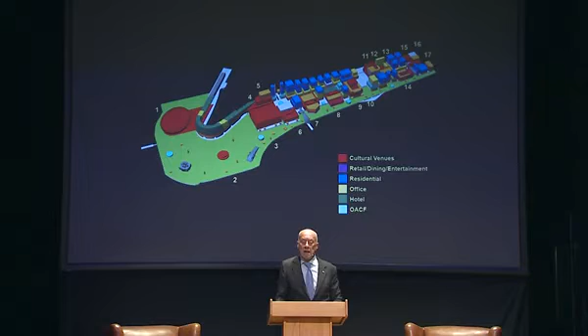If that was one example of a master plan, then a second is in Hong Kong, West Kowloon to be precise, as a kind of extension of the city. Here you can see it as a three-dimensional computer-generated image. What I'm not sure you'll be able to see, but in the bottom left projection there's a yellow line — that was really an extension of Hong Kong.

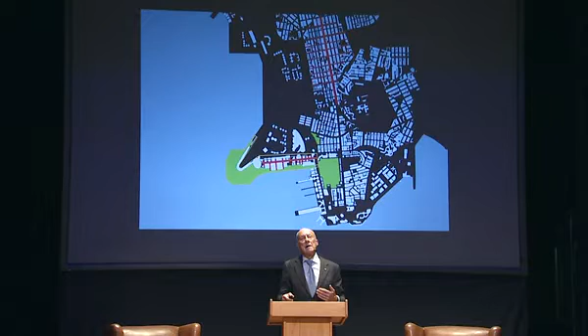So how do you recreate another part of an existing city with an emphasis on culture? Well, our starting point was to try to identify the DNA of Hong Kong itself. That started in the age of a computer with a sketch, a series of sketches to identify those characteristics, to try to abstract them out and distill the best of those urban qualities, but at the same time to alleviate, to take away the pollution and the congestion of traffic.

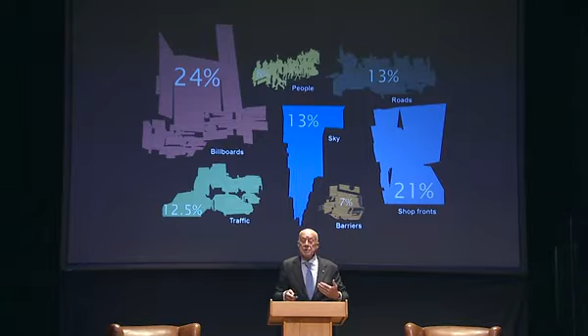So that led, as you'll see, to a kind of multi-layered solution. But first, the analysis — you'll see a proliferation of signs, and you also feel a certain proportion of the main streets and the alleyways. This is just a very, very small extract from that master plan, in the same way I'm only showing you a glimpse of the previous one, Duisburg. So when you abstract that out, and then find the percentage in the visual field of each of those elements, that then becomes a design tool to recreate the extension of that.

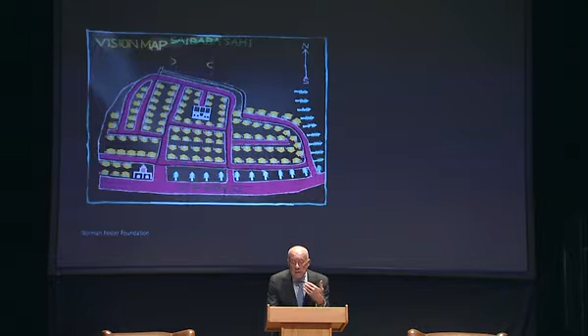When I questioned them on their design decisions — for example, the symbolic trees at the bottom, why is the landscape there — they explained that was the direction the hurricanes would come. Then I asked what the white building in the middle was. They said, the white building in the middle is a sanctuary, which would enable us to find protection. We would not have to leave our community in the event of a hurricane warning.

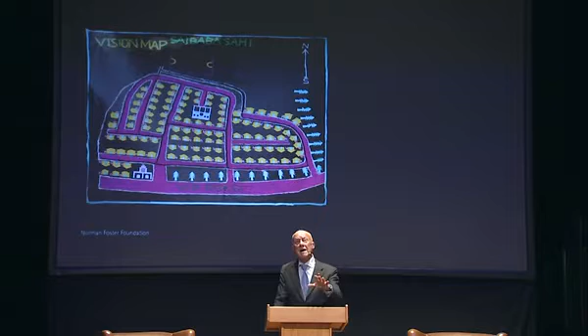Then I talked about the space to the north, and they said, that's a swamp, but we would see the swamp filled. And I realized I could have been talking to a group of students in a school of architecture.

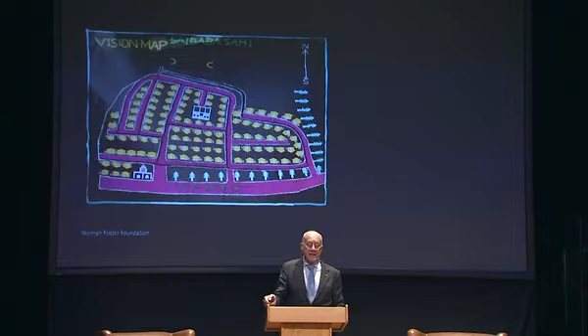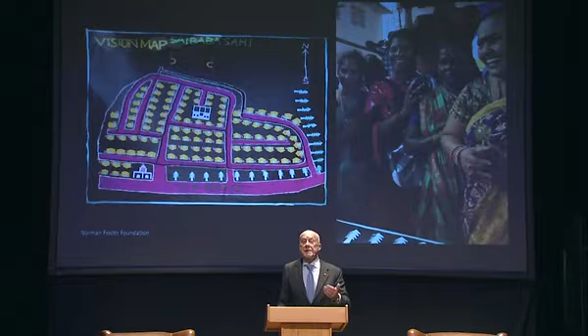I asked, who was responsible for this? Of course, the ladies on the right, ranging in age from grandchildren to grandmas, were responsible for this extraordinary design vision. That gave us the clue that perhaps models and graphics would be a way to work with a community like this to effect that transformation of standards.

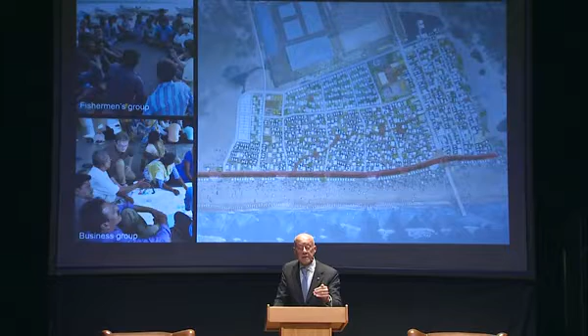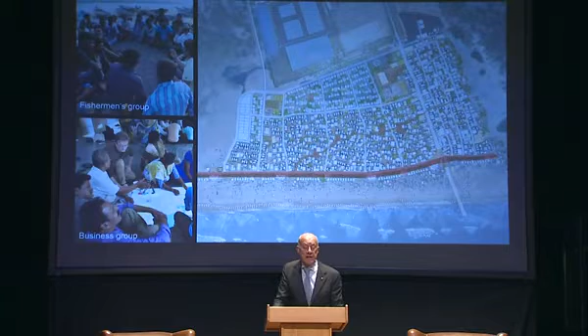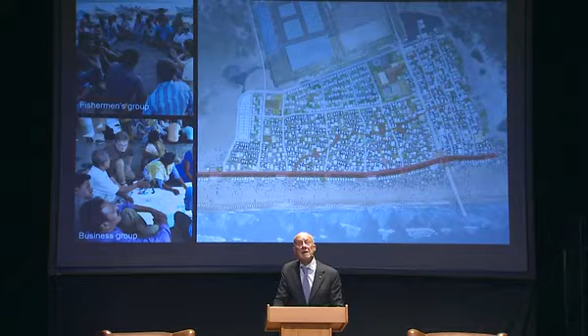If you retain the image from the past, the dwellings have been taken from there because they're vulnerable to hurricanes. The swamp to the north has been filled — that's a relocation for expanding the housing. Then the business group: you'll see that diagonal route, where all the shops, the commerce, the informal trading would take place. So the businessmen wanted that route strengthened and improved, and the fishermen wanted the coast improved.

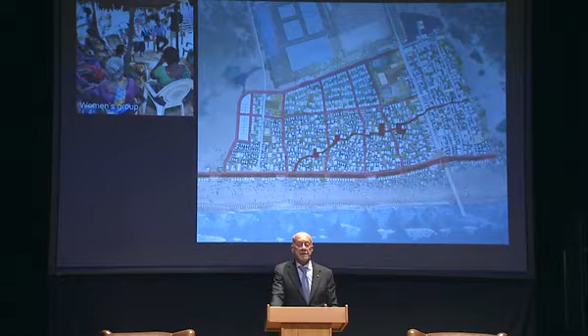And amazingly, the women wanted more safety, more security, and their contribution was the lines that run at right angles to the water. So there was an increase from 50% to something like 93% in terms of access.

We were using models, working with the community, encouraging them to contribute to the process, to identify their desires and how to overcome some of the shortfalls. That model then became the basis for a town meeting and voting in favor of the master plan. Again, quite interestingly, the predominant group are the women — they're the real creative driving force behind the community, with the fishermen obviously creating the livelihood.

As in any project, in any city in the world, all of these decisions have to be filtered through the various committees, the various groups within the civic authorities responsible for health, traffic, and movement, and eventually the use of models for those public spaces. The revolution over a 12-month period of this project is that it moved that community one step towards the individual house with the individual bathroom. It's a transition period - it moved from outdoor toilets to latrines, a significant step along the way, creating a network of public spaces.

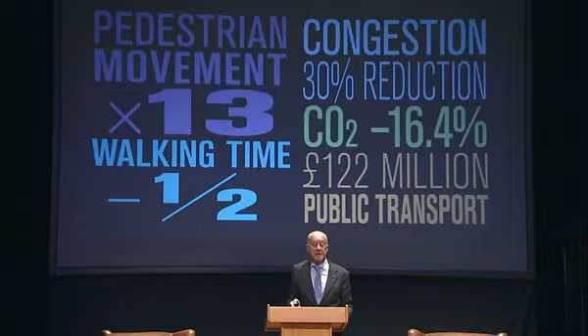That congestion charge injects annually something like £122 million into the city economy to subsidize and improve the quality of public transport. We're talking about infrastructure, and infrastructure is not just about communication in terms of walking across a square - it can be electronic communication.

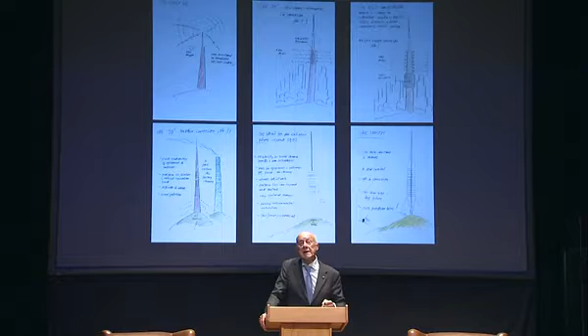Of course that's an extraordinary challenge to take on the monopolies and all the lawyers. This is just an extract from the presentation - it was an international competition. These sketches compared the traditional concrete mast and suggested something that might preserve nature, sit more delicately on the mountain, and be a cable-supported structure. It hadn't been done before, but there was no technical reason why not.

If infrastructure is about connectivity, then this viaduct in Millau, again the result of another competition - traditionally a viaduct is civil engineering, inescapably the domain of engineering. But the rules stipulated that this was too important to leave to one profession alone, and that teams should be integrated with architects. So it was very much a collaborative endeavor.

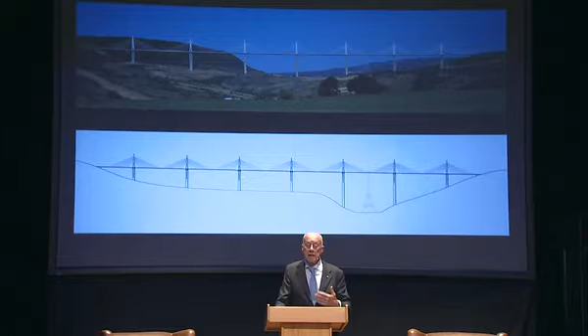It's significantly higher than the Eiffel Tower, and many times you drive across it literally above the clouds. The sides are transparent, so you're aware it's probably the closest thing you can get to flight without actually leaving the ground, and it dances very lightly across the terrain. So it's very much working with nature, and it's highly symbolic.

A bridge in that environment has to be seen in the wider context of what it was like before the bridge. Before the bridge, especially in peak holiday periods, there was a massive surge of traffic through all the local roads - literally 5 hours to traverse from one side of this valley to the other. This is in mid-France, in the Massif Central. It's very difficult to quantify the effects of an intervention like this - there's no way we can measure the pollution that's been reduced by private cars.

But interestingly, just trucks going from Paris to Barcelona, because they have the black box, you can measure the difference in carbon emissions. And the difference is the equivalent of planting 40,000 trees of forest in terms of the reduction of carbon dioxide, or the equivalent of the absorption of trees like that.

If I move to an urban version, a mini version of that viaduct, it would be a small bridge, the first for centuries, that would connect pedestrians from the rich north side of the Thames to the traditionally poor south side of the Thames. And this sketch, part of the competition submission...

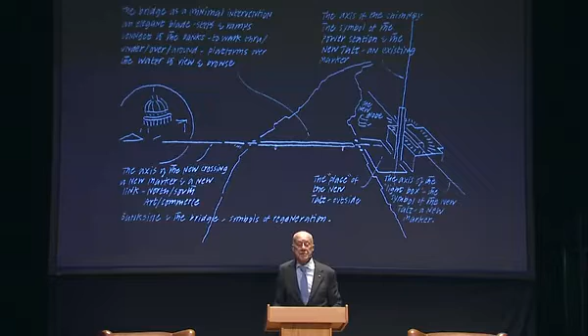stated that it should be the most minimal, literally a blade of light. So it did not compete with the historic monument of St. Paul's Cathedral, which it would be on axis.

And this is a new kind of suspension bridge. It's very, very low. Traditionally, a suspension bridge goes high, the cables go high. So the loads here are enormous, but they're low slung. So it is the most minimal intervention.

You can see that it's on the axis of St. Paul's. You can also see that it's on the axis of Tate Modern. There are huge uptakes in admissions to both Tate Modern and visitors to St. Paul's, which we have not measured.

But what we did do, we used a group called Space Syntax, which I'd worked with when they were based in university. I'd encouraged them to come out of university and create a consulting arm. So we engaged them to predict the improvement in connectivity of pedestrian movements.

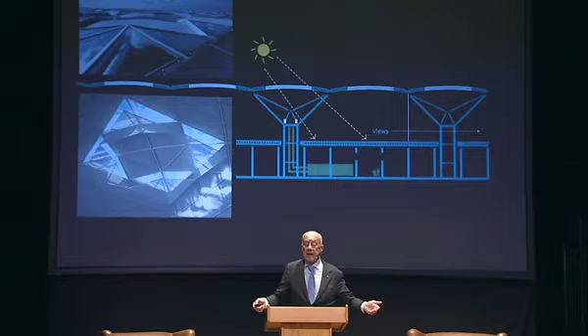So our move, which looks very, very simple, but actually seemed to take an eternity to finally discover, was literally to turn it upside down, turn it on its head. So all that stuff in the roof goes in an undercroft below. So suddenly, with a cantilever structure, you can get big spans, and you really can open it up to nature, sunlight, movement of the clouds, and that becomes completely transformational.

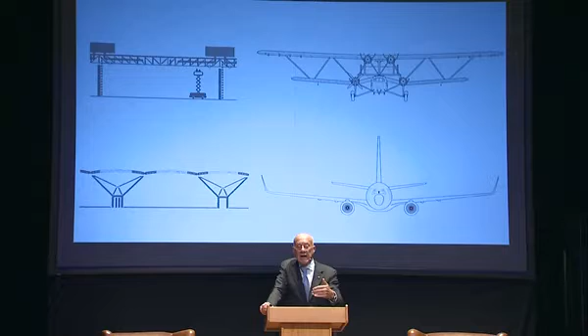Interestingly, it has its equivalent in the world of flight, and as a passionate aviator, I just love everything that flies, but I can draw an analogy between the trussed biplanes of the past and the original model of the air terminal. And the transformation is very much like the transformation in the aircraft itself.

And I described it really as an analog experience in a digital age. So it's very much about connecting with nature, with the views, and knowing where you are so that you can navigate those spaces without needing the help of signs and numbers and symbols.

And in a way, the airports are like the train stations of the past. They're the gateways to the city, and they're symbolic of the nation. So they're more than just a terminal.

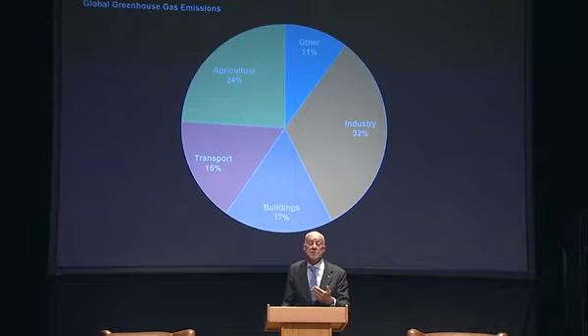I hear there are a number of fashions, and one of the fashions in currency is to question the validity of doing buildings for air travel. I would argue that the buildings deserve the maximum attention, like any other kind of building in the world, to reduce the energy, to make them more sustainable.

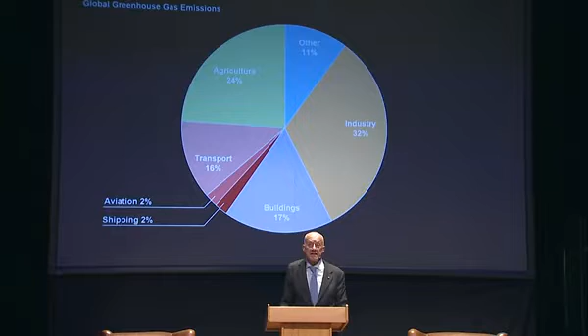And to put it in context, aviation is responsible for 2% of greenhouse gas emissions, compared with shipping, for example. And if you take a cruise liner, a cruise passenger is consuming twice as much energy as an airline passenger. So I think it's very important to put these issues into the wider context.

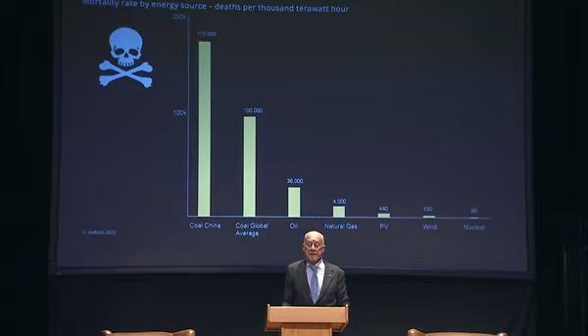At the same time, energy is the heart of combating climate change. And if I look at the realities of mortality, of deaths caused by the generation of energy, something like 10 million people die every year through poor air quality, many of them children, from heating and cooking by fossil fuels.

Remember also that at the moment, 80% of electricity is generated by fossil fuels. And the renewables, which account for about 10%, need a fossil fuel backup because of battery technology so far.

And I would argue passionately in favor of nuclear, which is very, very controversial. It's outside of the manifesto, the declaration of San Marino. But at the same time, it does refer to clean energy.

If you look at the deaths related to a unit of energy, in this case 1,000 terawatt hours, then in China we're talking about 170,000 for coal, on average globally 100,000. And right down there is nuclear at 90 — and that's including all the disasters from the early generation power plants.

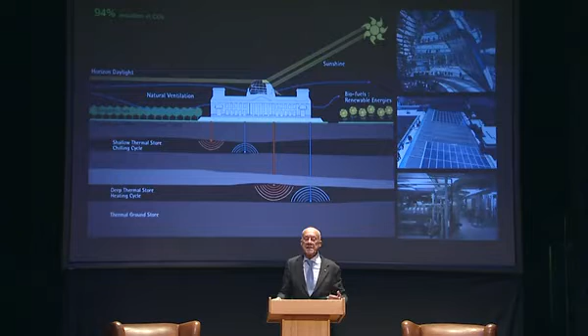So I can describe this in social terms, or I could describe it in environmental terms, because the mirrored cone is reflecting natural light deep into the building. It's working as an extract aerodynamically to create suction, to pull fresh air through the building. Aquifers are deep below ground. So this is essentially using solar cells, all the elements of sustainability, to create a zero carbon building.

Now, there are various ways in which we as a profession can measure the sustainability of a building. BREEAM is a very popular one. LEED is the American example, but there are many different kinds. The reality is they're a very, very significant step in the right direction, but they don't go far enough — they don't take embedded carbon in the materials, for example.

So we have recently, with a project which I'm just going to give you a glimpse of — it's still just finishing construction, it hasn't been occupied, but it was the building that we showed at COP26, and it's the most sustainable project that we've done so far in our 6 decades or more of practice.

It took an industrial building on the edge of Madrid. Interestingly, this building produced fossil fuel gas at the turn of the century for the city. We repurposed and recreated it, surrounding it with greenery and gardens that would absorb carbon dioxide, and also create public access, a new park for the local community, as well as the headquarters that would eventually be accommodated here.

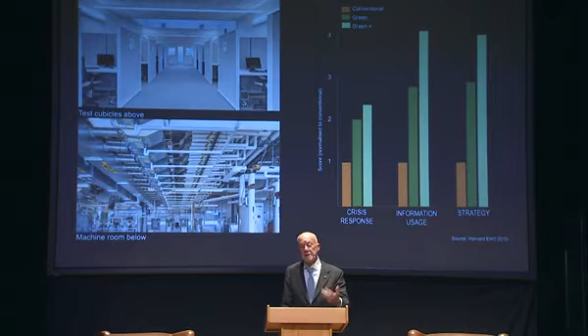Below that floor is a plant room that can simulate the conditions of a conventional building with recirculating air, a central system, where you can simulate the kind of building that I just showed. And the results are overwhelming. This is a tiny glimpse of those tests. The brown is a conventional building, the middle green is a green building, and the light green is the two buildings that I described, kind of super green in terms of their environment. So a huge improvement in human performance.

Innovation can come out of research or it can come out of incentives. I was persuaded, I didn't need too much persuasion, to add my name and to participate in Switzerland in an award that would, for the first time, award not just energy efficiency, but the balance between energy efficiency and architectural aesthetics.

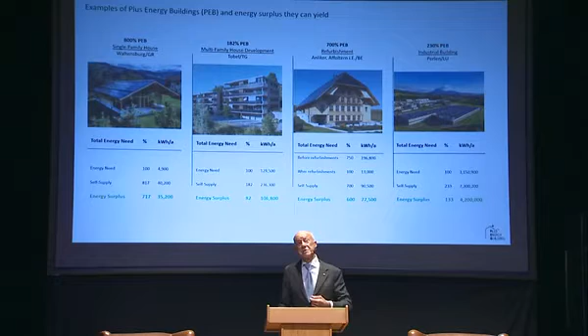The results over the decade or so that it's been in use are really quite amazing. You won't be able to read the fine print, but essentially these are generating up to 7 or 8 times the amount of energy that they consume, and they are exporting that excess energy from the solar systems back into the national grid, or they're charging electric cars. It's probably worth noting in passing, it's very fashionable to think that if we have an electric car, it's a clean car. The electric cars charged from these dwellings, buildings, industrial buildings, would be clean. But if that electrical energy is being produced by a fossil fuel power plant, it's essentially still a dirty car.

If we move on and conclude, what I've tried to do here is what I was asked to do yesterday, and that was not just to help launch the declaration, but to try to bring it to life, to say please join us all in signing up to this, whoever you are, in terms of your impact on the environment, whether you're an architect, engineer, a politician, a civic leader, a developer, whatever role you play, bring it into action. So I've tried to share some of that with you today.

Thank you very much. Thank you. Was it too long? Thank you. Thank you. Thank you. It was very much needed, I think. Thank you.